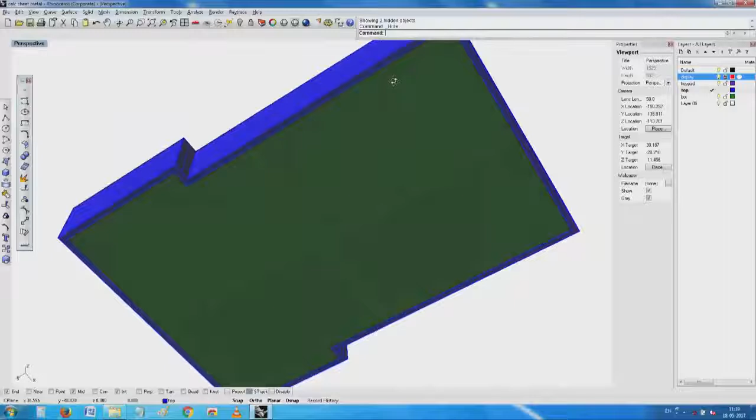If you follow this procedure, and if you have all the various things like keys and all that, things are relatively easy for us. Let me see what I can get back for the present.

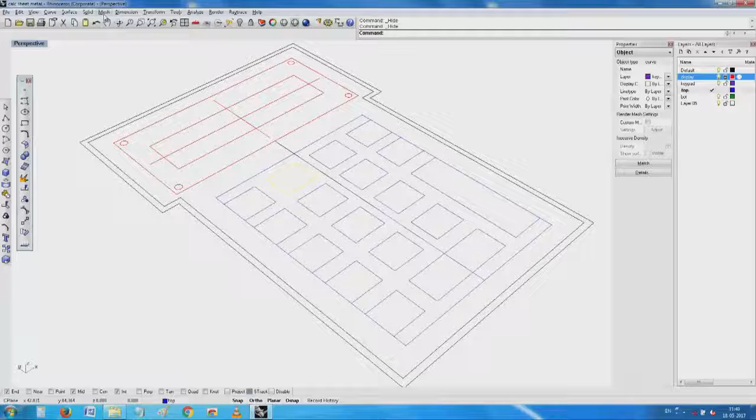See, I have all those beautiful keys that are still present. All that I need to do at this point is make all this and see if I can make some keys. If I see this one is probably unique, I make a solid out of extruding this planar curve. Similarly, I take this, make this also into a planar thing, make this.

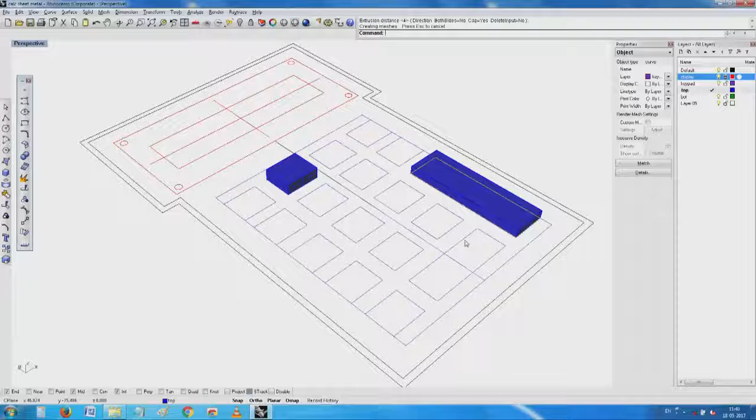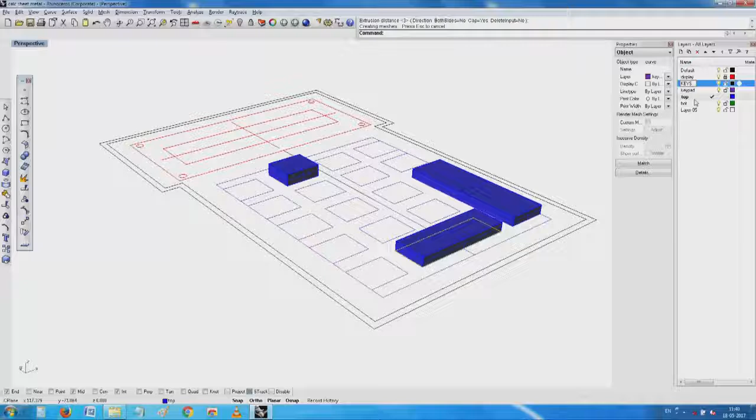So I will make one more new layer which I shall call keys. Give it some exotic color, in this case maybe a little purplish color, a little dark is better, otherwise it won't show.

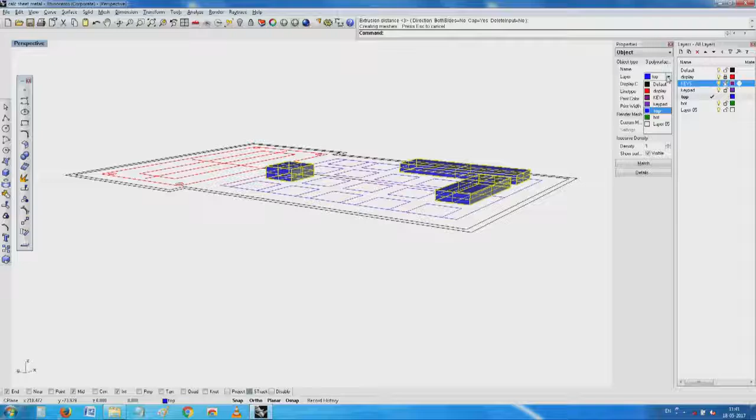Change all this into that layer, make all these properties, change them into the keys layer, and see if I can play around. I have this nice key ready now. For purposes of this, right now what I will do is only show you the filleting of the top.

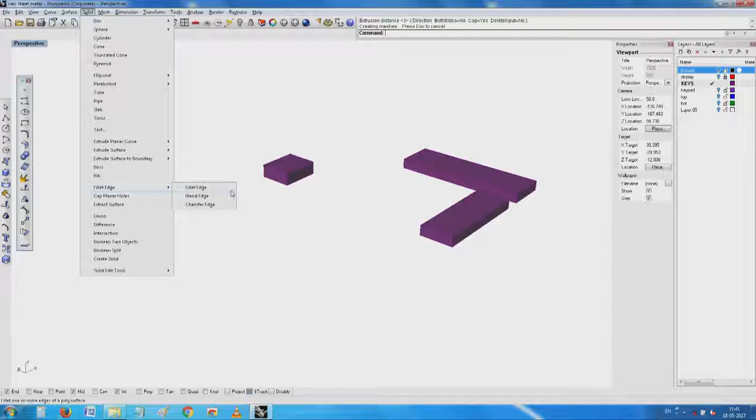I have a nice key there. Seen that? It is also possible for me to make the other corner also of a similar dimension.

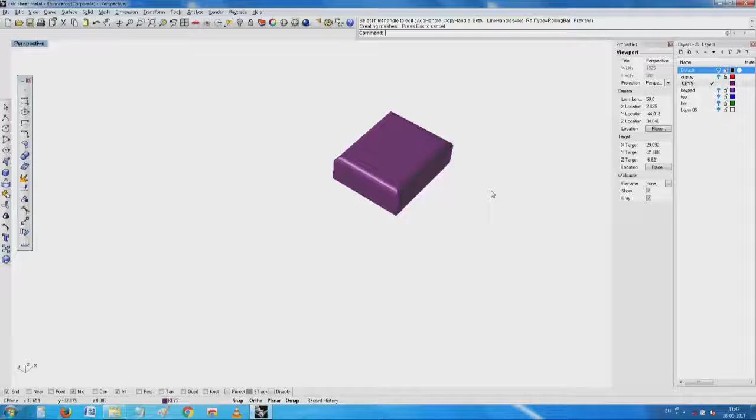Unfortunately, this package of mine does not make such beautiful things, but I will try. You see here now I have a nicely, beautifully created thing here. You see the difference - now if you compare the corner to the other one, here the corner also is rounded, which is probably one of the ways.

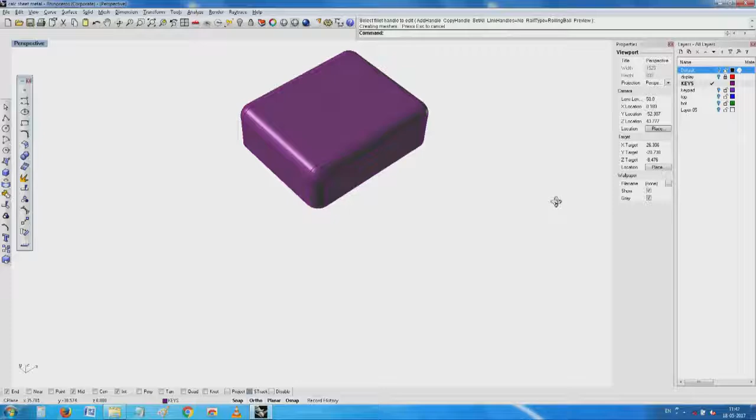Now I can use this as it is, or go back to that point I showed you and see what I can do with this. So one of the keys I managed - I will go back with the other keys and quickly finish that.

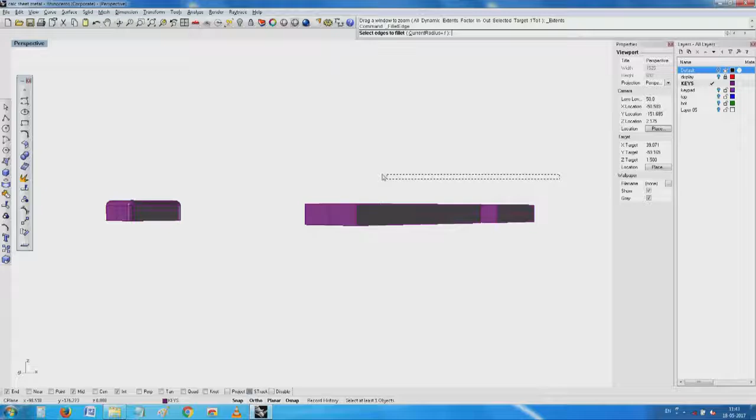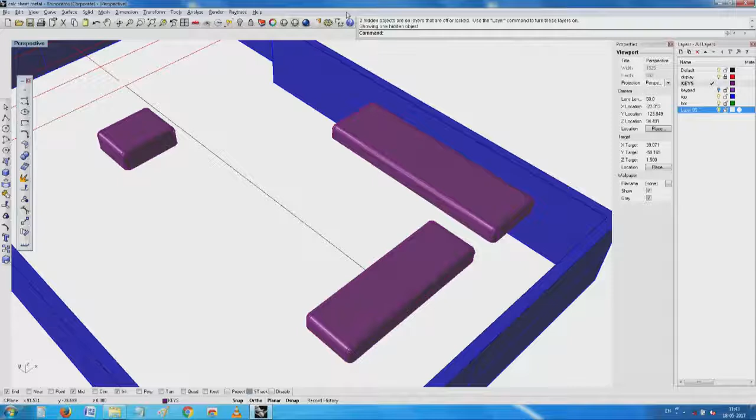Not bad, it works. So I switch on the top, then I switch on all other layers including the default. See here, you've noticed nicely, I have those cute keys sitting here in this place.

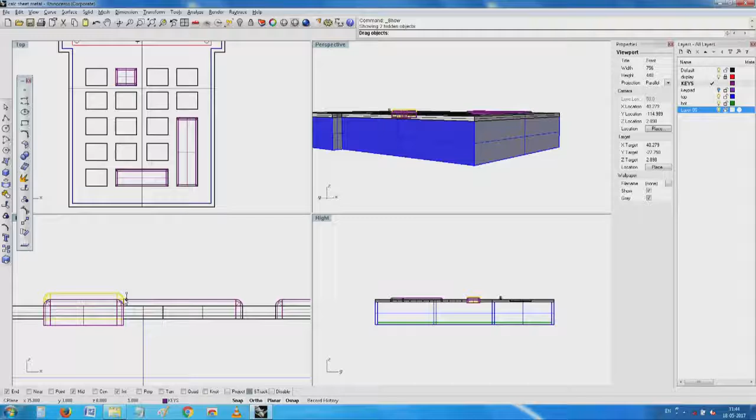So if you see one of these keys, this one now seems to have popped out a little. I will see if I can push it back. I have a keyboard in which all the keys are sitting comfortable and flush. It is just for me now to take one of these keyboard keys and try to copy it in the suitable place.

I have got 4 keys copied here. I will now see this whole bunch, whether I can take it there. Not bad. I will take these 3 keys, copy them here again.

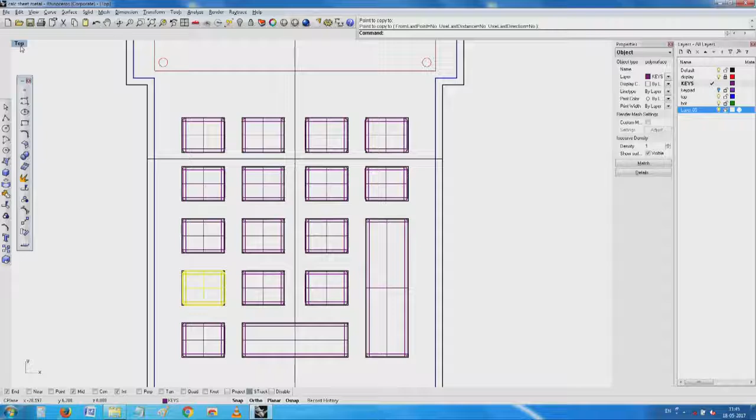My device is slowly getting ready. At this point, as I pointed out earlier, if you are to make it in just simple plastic or sheet metal, my suggestion is you can go ahead and leave things as they are.

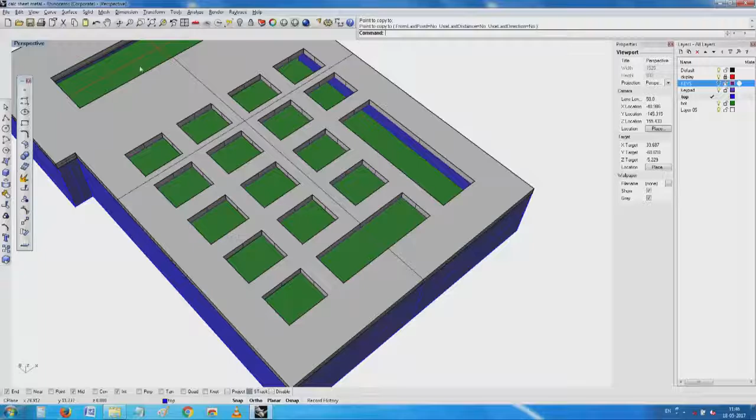So if I now switch off these - go to the top, switch off these keys - see, I have those openings back where they are. At this point, if you remember, the corners were not very good after the first key I made. This appears sharp here. In reality, things are not sharp.

So it is possible for me now to go and see whether I can repair this old same solid. I again try to make the solid fillet edge, and instead of that large diameter, generally I will try to use a smaller diameter.

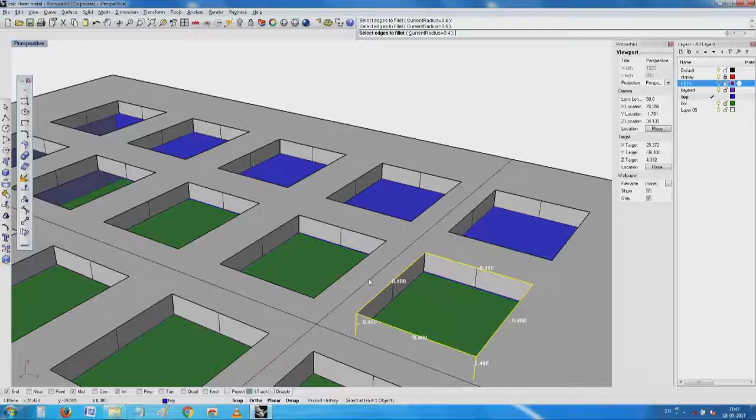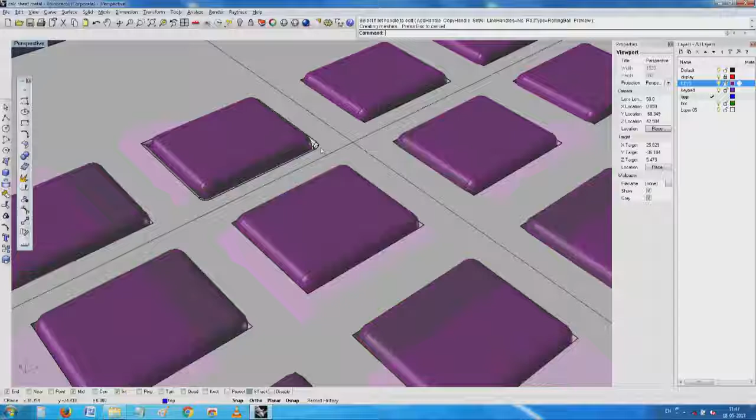See what has happened of it. If I just switch on the keys layer again, you see here, this seems to be more what we were looking for. Understand? This seems to be a little better than what it is, because the color does not look very elegant. However,

I just wanted to show you that this is a simple way of building those things. But the moment you have more of these fillets, more of these things, the drawing is likely to become big, and my small ancient, archaic desktop is not able to handle this and affect regeneration.

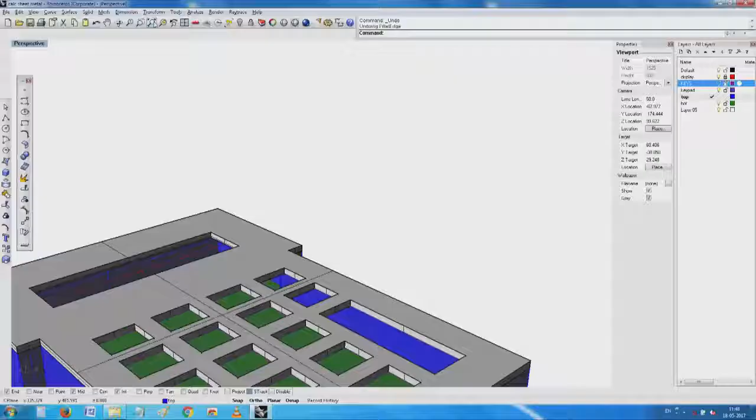Now, for us to make this - it is very easy to fabricate this if I have to. I just need to take only this top portion.

Take a printout of this, a 1:1 printout, stick it on another thing. It could be sheet metal, or it could be a plastic sheet, or it could be any other thing. Keep it on that and try to open these things.

And if you have a file, this file can be sent to the laser cutter. So what the laser cutter does is, depending on how well you make the proportions and the gaps and all that, it will give you an identical piece like this.

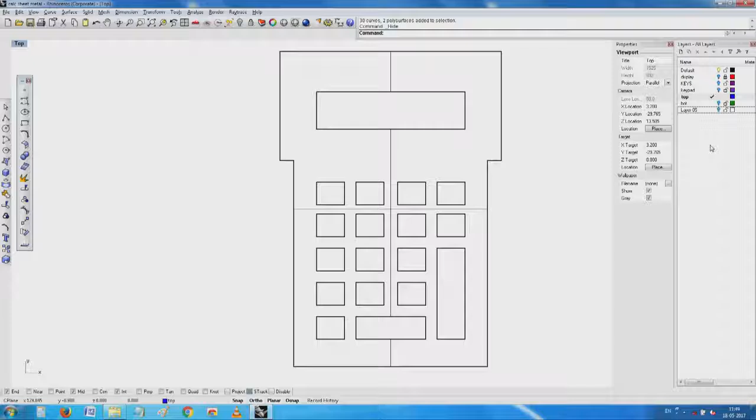Now it is convenient for us to make things very quickly. I have started with a simple outline, then I have started to remove the various keys and all that. This I can conveniently pass it on to any other fabrication facility.

So at this point, allow me to deviate and go to a way of, can I make something which is a little more elegant than this. All that needs is I will just start working with the green portion of it, which is the bottom, then the blue portion of it, which is here, and then I try to remove all other things.

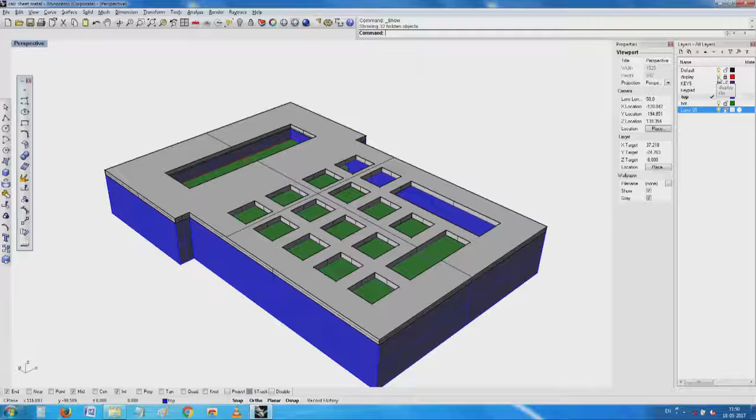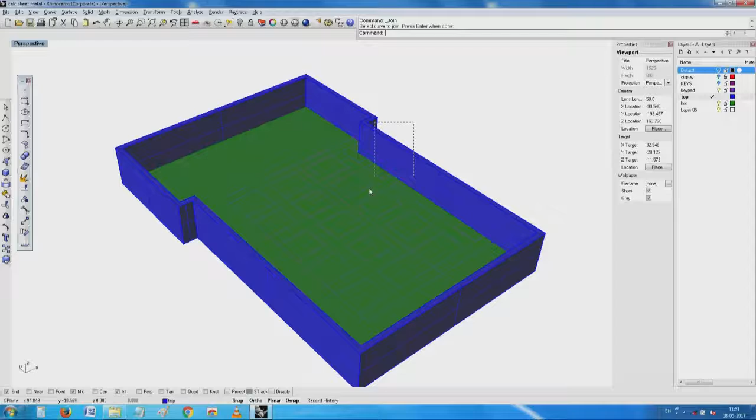Okay, I have these two together. Now I will see, depending on what mood my software is today, if I can join these two. This is a solid, this is a solid. I go here and try to make a union. I hope it works. Ah, it worked. Surprise. It doesn't often work, but today it worked.

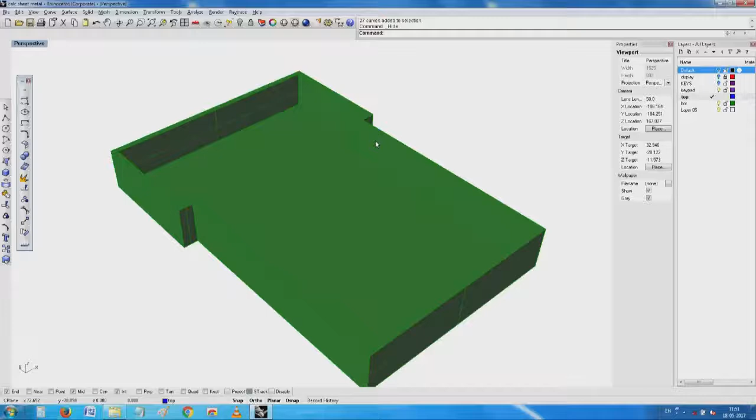Have you seen this? I have a nice cover made out of the middle body of the thing, and then the bottom, they have been joined together. It's convenient for me because I can turn the other piece upside down, build up all my things including the PCB and all, and put it here. One way of making it is that.

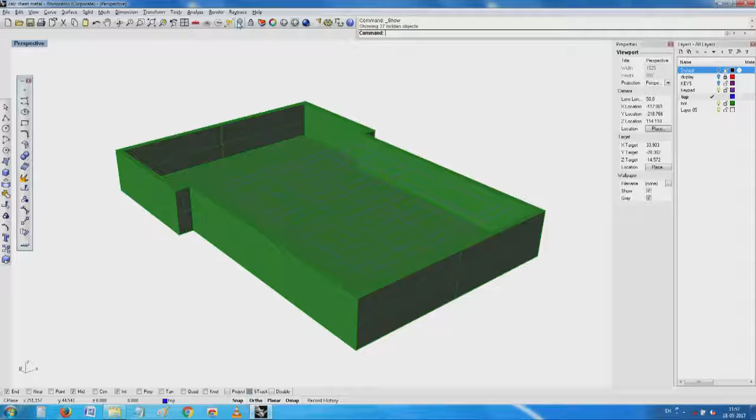Other alternative will be maybe make the top and bottom, make it into two halves. So I go back to the bottom. You have seen this. I can maybe join this to the other one and then try to put things inside, which is equally convenient and easy for me.

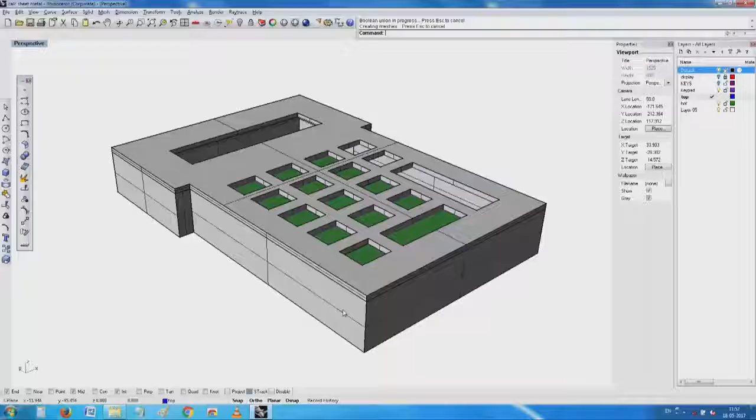Seen this here. As yet, these two are of different colors. It's a matter of a very simple principle for me to join these two. So I'll try that now. I'll make a union of this with this. Hey, it is joined together. Big surprise for me. Yes, it joined. Haha. Only thing is the color, this color is very different from the rendering color.

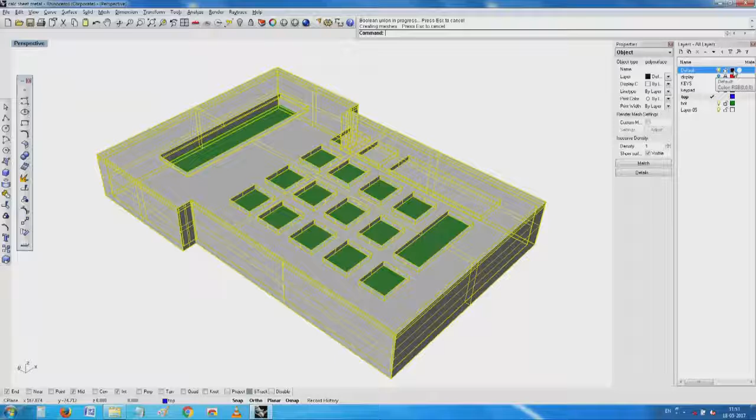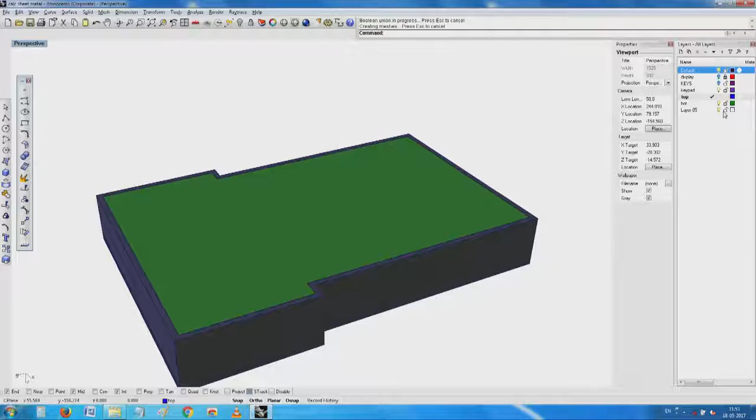I am happy that I have an object like this. I will see which layer it comes to, the default layer. I will see if I can change the default color to something more pleasant. See here, I have a top cover with a bottom. So for the present, what I will do is I will try to shut off the bottom like before. Have you seen this? I will see if the color can be made a little brighter.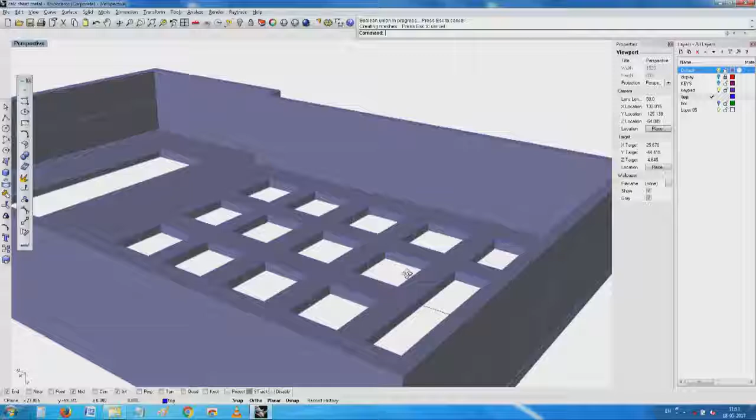So I have all the four corners. Now at this point I need to see if I can do something to make things a little easier. As I said, the machine is simple and the package is equally simple, so put up with it. I will try to fillet only these corners. This part I will come back to later.

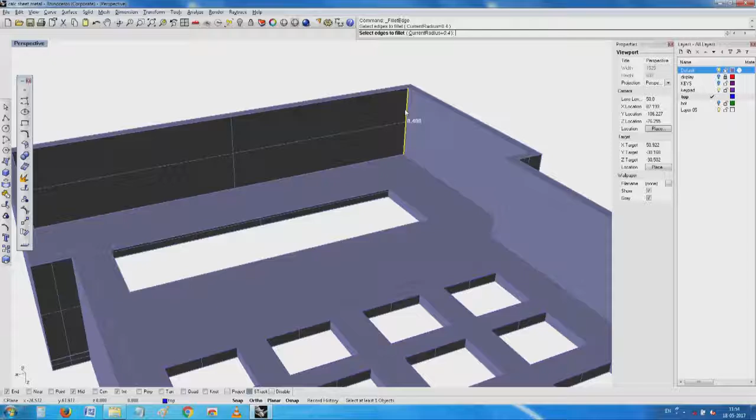So I will make a solid, and then as before I try to make a fillet edge, and by default it shows some 0.4. I will see. Have you seen that? It looks like a small fillet has been created there.

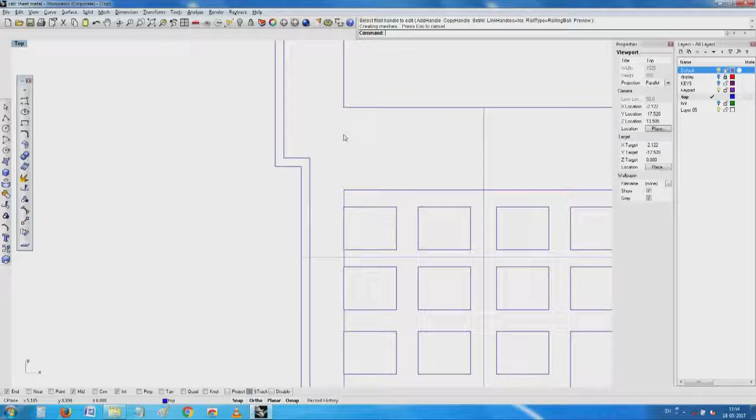Can you see here, a gentle fillet of the body has been created. These are only the construction lines. I will hide the construction lines, and you see nicely I have a corner that is made there. That is the filleted corner. Can you see here, a small internal 0.4 I have given.

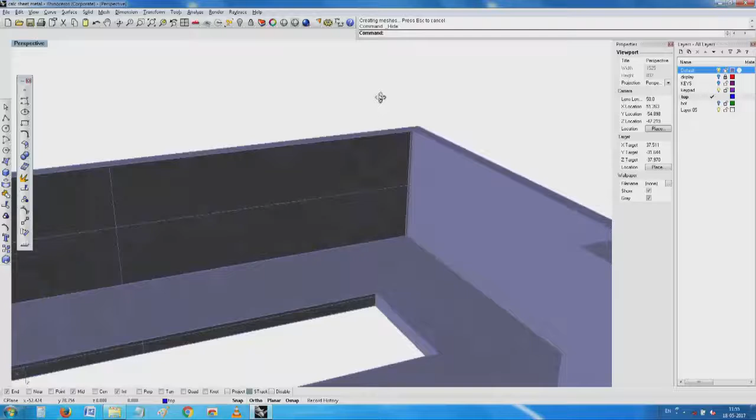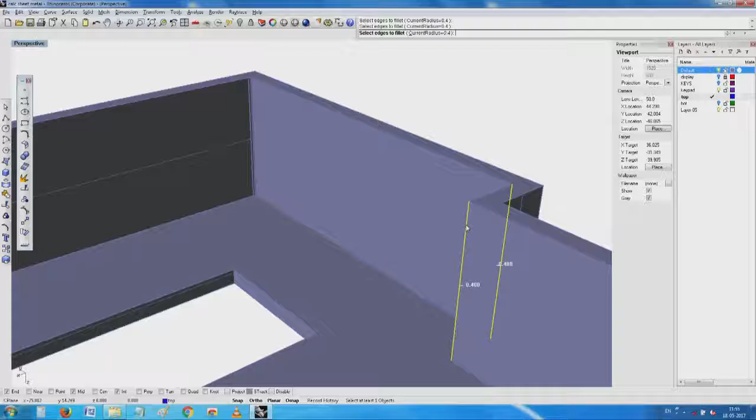I will see if I can continue this in all the corners. I will get back to the old filleted edge here, and then to make things a little faster, I will just stick to one edge filleting for all the openings and see how well things come out.

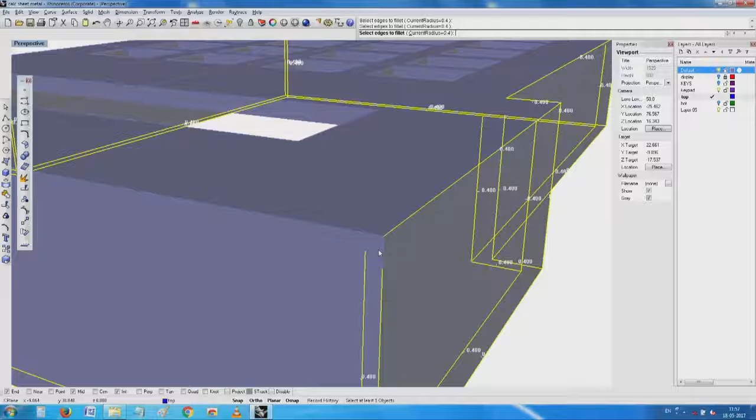Sir, thanks for your patience that you are trying to hold on. As I said, I have no option but to wait.

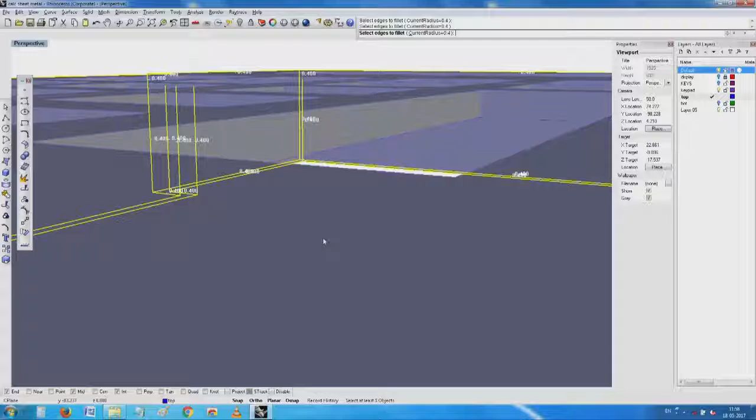I think most of the things have been covered. If a few are not covered, see here.

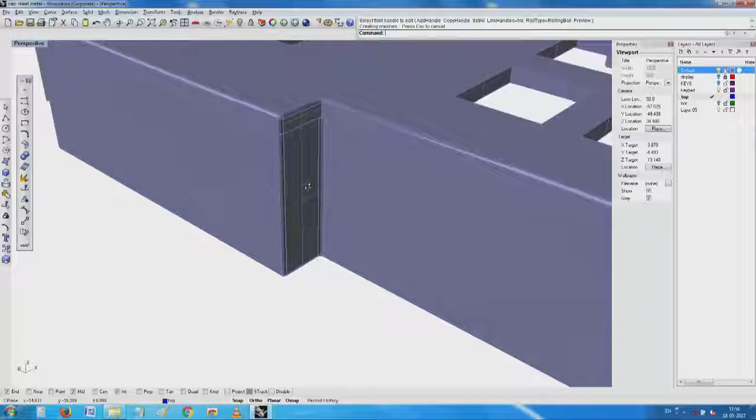Now you notice nicely that all the edges have been smoothened out on the outside, and similarly on the inside also things look better.

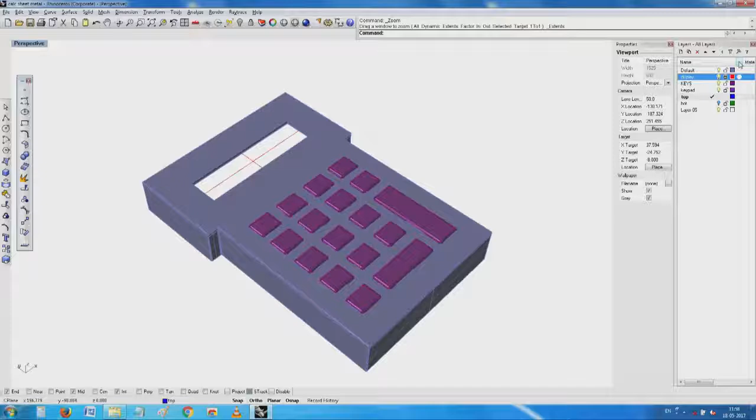Now I have a reasonably good enclosure. Now I will switch on the keys, and then switch on the bottom, and then I have a display and everything, a thing which is ready.

Right now I have not yet talked about the material properties. I have not talked about how to do the rendering and so on. It is just that using basic surfaces I have started.

The display PCB which I wanted to use, again taken from the wish board or the breadboard, and then try to go back to the drawing and build an enclosure around it using standard keys.

This is one way of it. Alternatively, if you are very sure that it should be only so much, I can show you things on hand. This is the older one, and this is the newer one. You see, everything is smaller and all that. Both have their place. Okay, so it is possible for you to go from outside to inside or inside to outside.

If we had only stuck with known available components, progress would not have happened. So things like this have a place, there's absolutely no issue about it, they all have a place. And the place is saying we try to assemble and make this only as a model which can be eventually scaled up. But then industrial designers, or designers in general, have been working on these things.

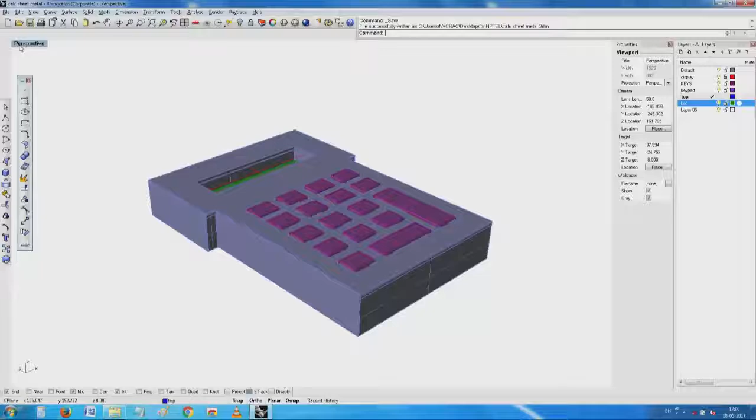And coming out with concepts like this.

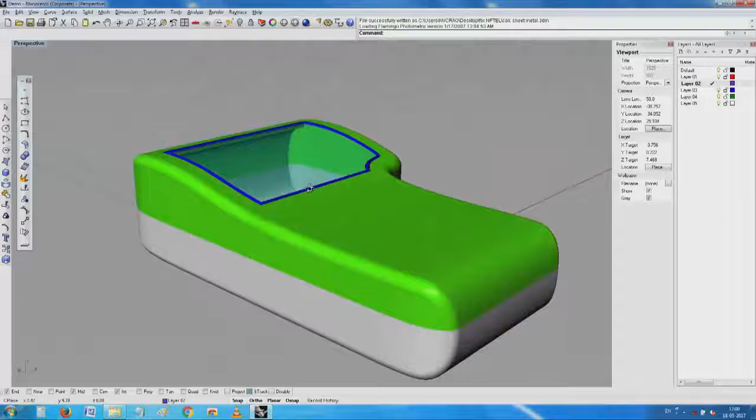Seen this? To start with, this is not very symmetrical. You have seen that, no?

In reality, symmetry is not the thing which is there, because if you hold something in the hand, something extending out is no problem, and we still have place here in which we can provide certain keys and whatever small things we want to do.

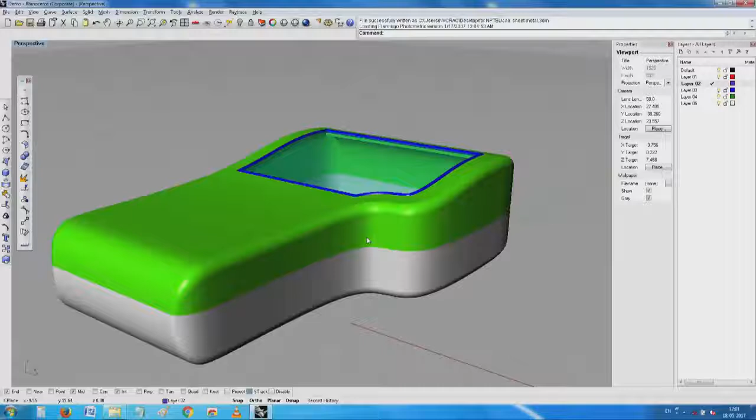Maybe we can provide a key here, maybe we can provide a key on this edge. So I still can do certain operations on this object and see things like a simple on-off or a rocker switch can be put here and so on.

Just a few more minutes, I will see if I can do something here. This time what I will do is, instead of the...

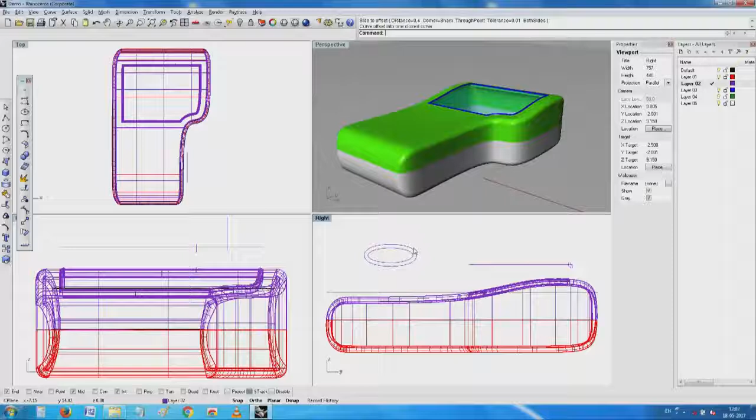See, I have two entities here. This one I will use for making a small opening here. So I will put one switch here and then maybe one more here.

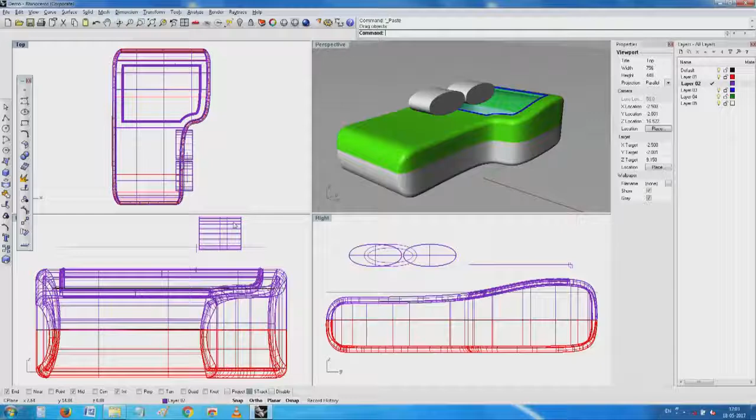See here, conveniently those two openings are sitting there for me. Now I will see that maybe this is not that elegant. Can I play around and see what best I can do with it?

I will see if I can rotate it by 15 degrees. Same thing here, I see if I can rotate this also by 15 degrees. You see here, I have now two openings, one here and one here, which sit like that. So I can put my fingers and maybe operate these things.

To make keys, I will use the same thing. Instead, I will scale them down. I will see if I can scale this down.

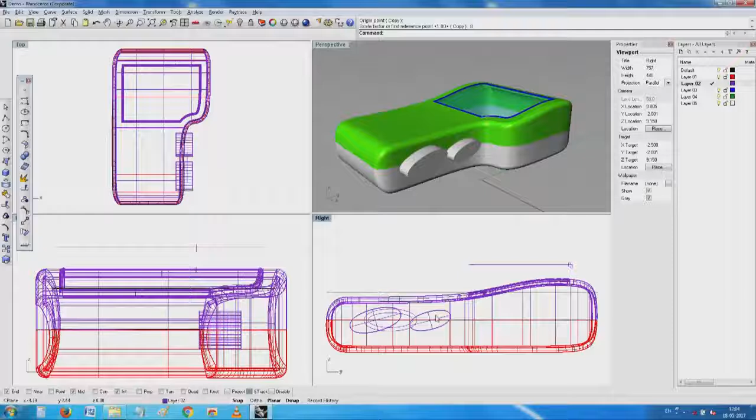See, this could form the key, this could form the other one. So to make these things compatible, I will just move it and keep it in the middle. So I have a set here which part of it makes the outside.

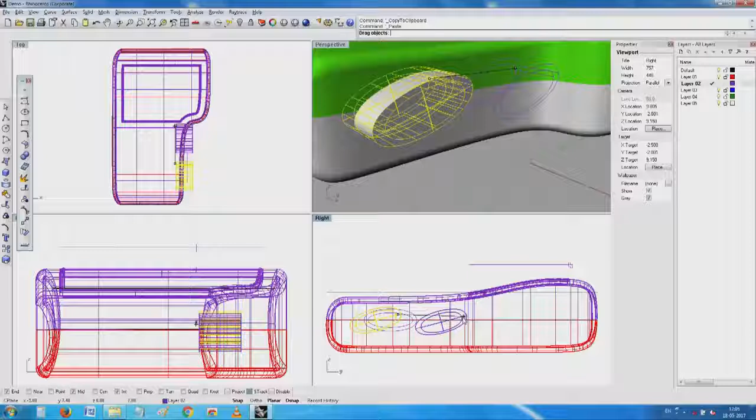See here, I have something which I have created on the fly. So what I will do is I will try to do a solid with a difference. An opening has happened.

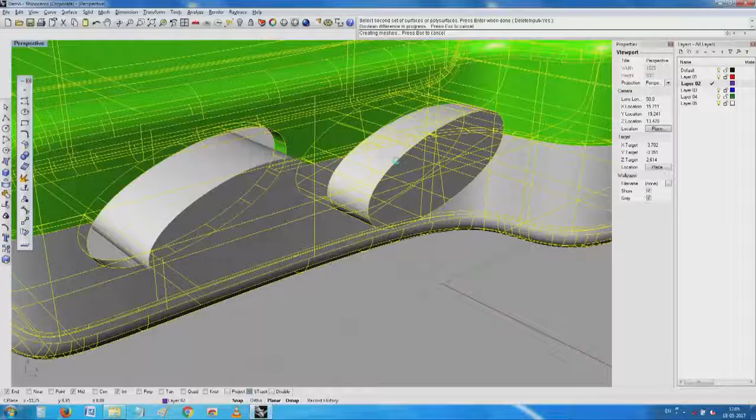See here, I have a nice key which now sits here. Don't ask me what it is, because I have created these things on the fly, trying to work easily. Then I can play around.

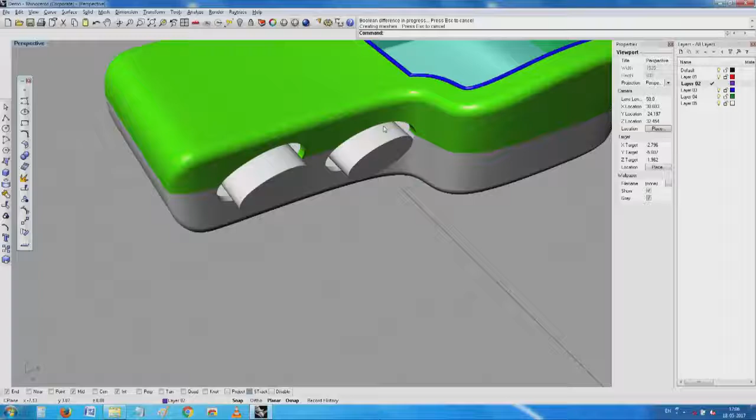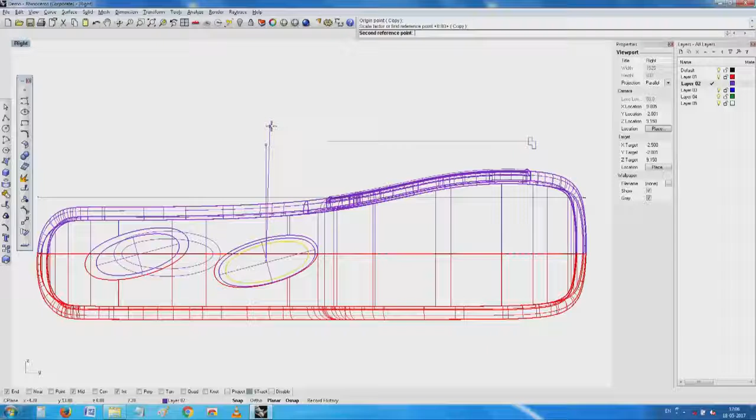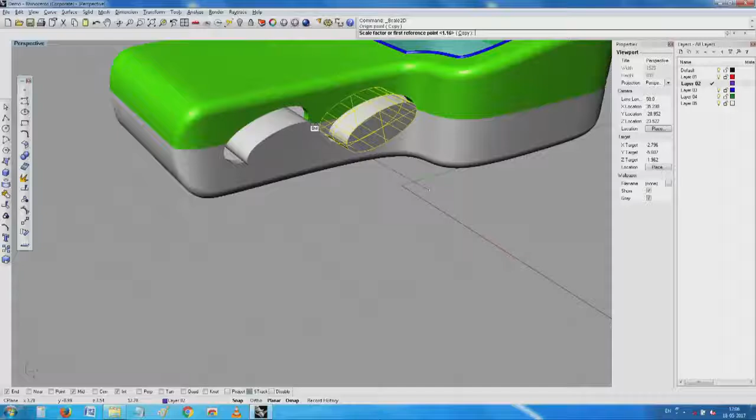This opening looks a little bigger, and then maybe I can scale this up. This definitely looks much more presentable compared to this key.

Can you see? Not too much of a gap there. So now I see if I can, whatever it is I wanted to do, I can play around and try to make what I call a fillet of this edge here and see how well it fillets.

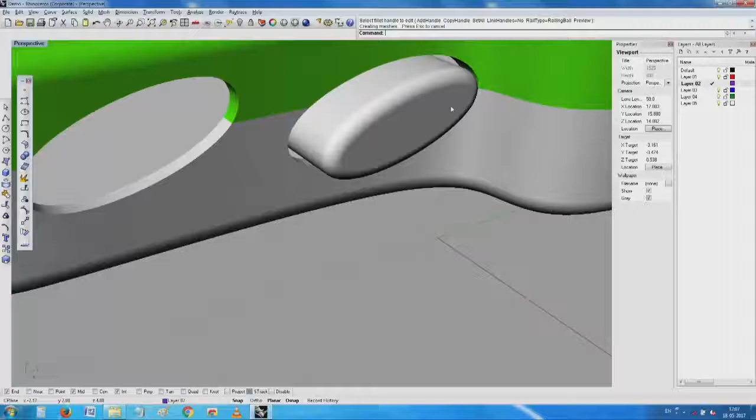I have a cute key there. I just need to copy this key.

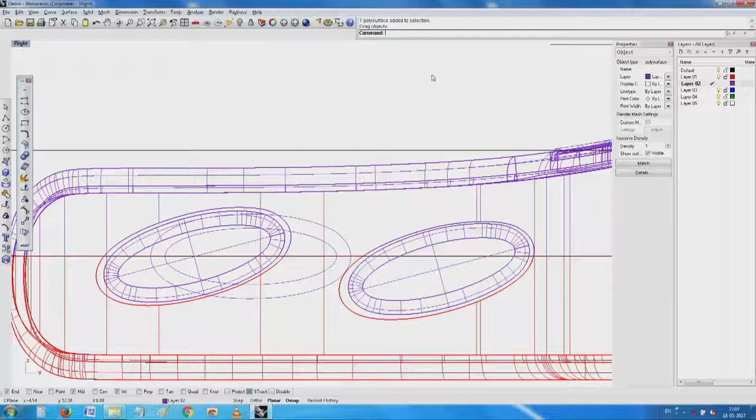So in this I have nicely created some object, I won't know what it is, and this thing can now be done by any of these rapid prototyping processes, including so-called 3D printing. I can use it for molding, and thirdly, a process still used occasionally is so-called vacuum or thermoforming. If you can make a matching mold and keep a sheet and press it, these organic shapes can very easily be created.

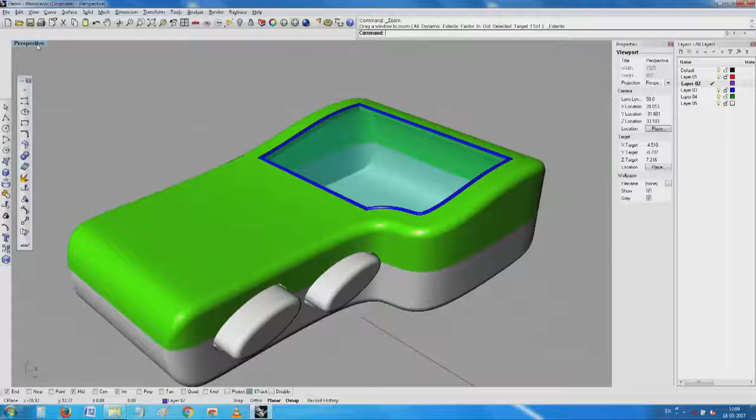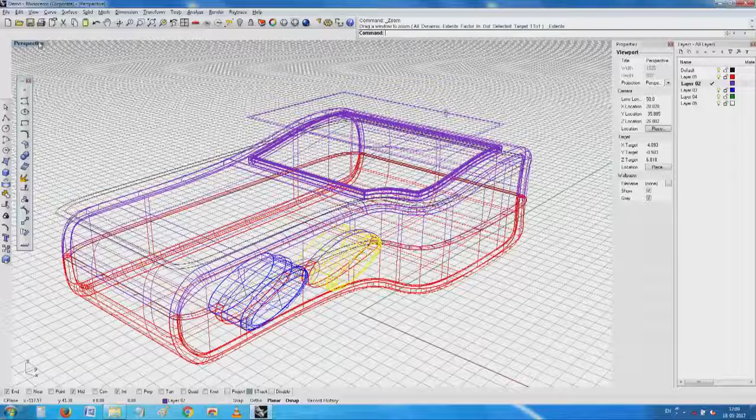Now it's for me to just make different colors of this, and for convenience I'll make this into a yellow key. This I'll make into maybe a blue key. You have seen this here, I have a blue and a yellow key. Now if I go back to the original wireframe, I have it like this, and when I regenerate it, it comes here.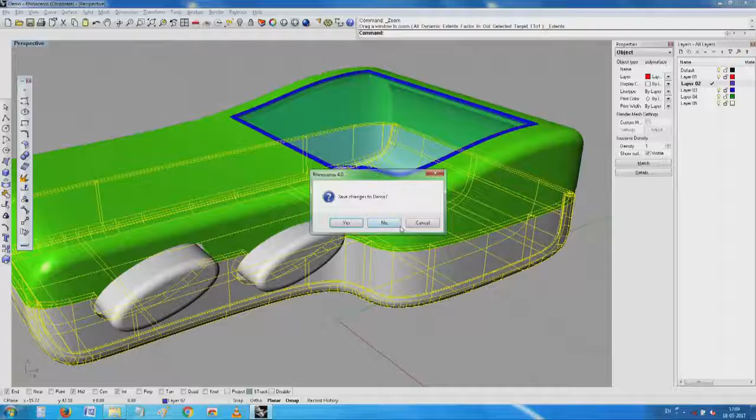Only thing is, during rendering materials, if I give the corresponding material, I have the necessary object. I just wanted to point out to you that the starting point is this. In this case, they are real life components, and I make the circuit, and then after that I do all these necessary operations and then put everything together, and then eventually we have a box.

Now the thing being that designers will parallelly always be thinking up of things which are better. That is how things like these beautiful objects you see are always there. Sometimes they are very functional, sometimes it is a matter of making a small differentiation for different market segments. There is always the upmarket, people would like to own things.

Initial stages I showed you about a Vertu mobile phone. Whether you get a strong signal is not important, the fact is it is rare, and other backup devices or concierge service on Vertu is very important. So we have very expensive things, same thing as you may have a watch which has diamonds rolling around in it.

Or something which is made with a bracelet. If you see toys for boys, you have diver's watch, and you have mariner's watch, and then you have aviators, aviation watches, where visual cues, everything is there. They can also be used, but routinely you do not use it for that. This is the differentiation or product positioning.